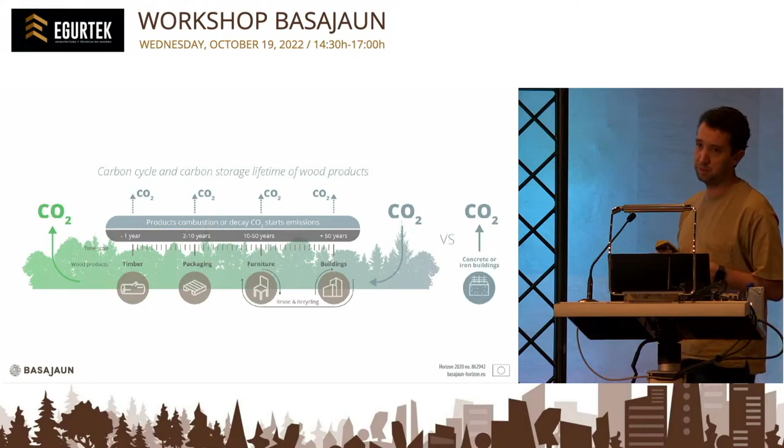We, as UNStudio, are responsible for the architecture. But it's not architecture in the classical sense. It's architecture as a systems integrator, working with different experts. So those are fabricators, those are research institutes, those are a whole range of companies.

And each of them brings the knowledge to the project, first in digital form, then it's produced throughout Europe again, all the way up to Hungary. It's tested, and that's how we work together, up to now quite successfully.

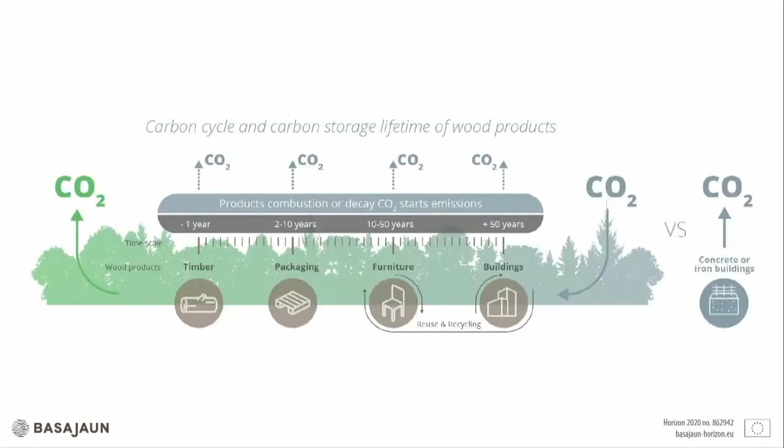And really looking at, we start with the raw material in the forest, so tree trunks, and then see how we can kind of upgrade it to a product and then assemble it in the architecture.

First looking at how we can optimize the resources, then from forest products into sub-products, then in systems. So a system in architecture is, for example, a window with a window frame, or a partition, or a roof panel. All modularized and described in our computer model, and then put together to an experimental pilot building.

And the last step, I think at the end of the process, is also the fact that you put everything together, but how can you take it apart in a smart way so you have the least possible amount of waste. This goes back to cradle to cradle principles and how you can reuse materials in a smart way.

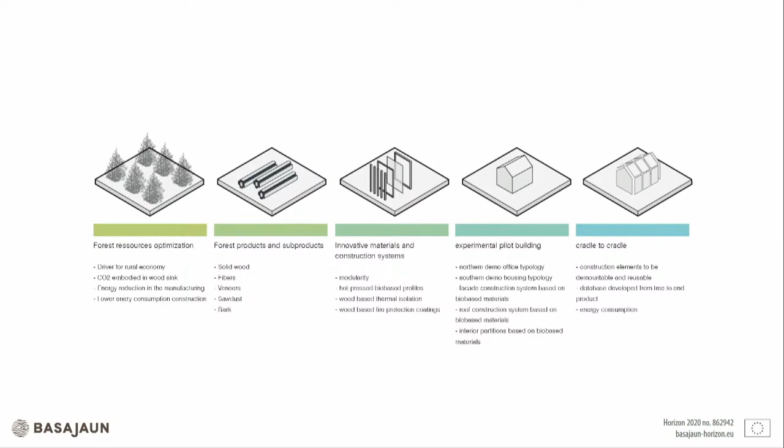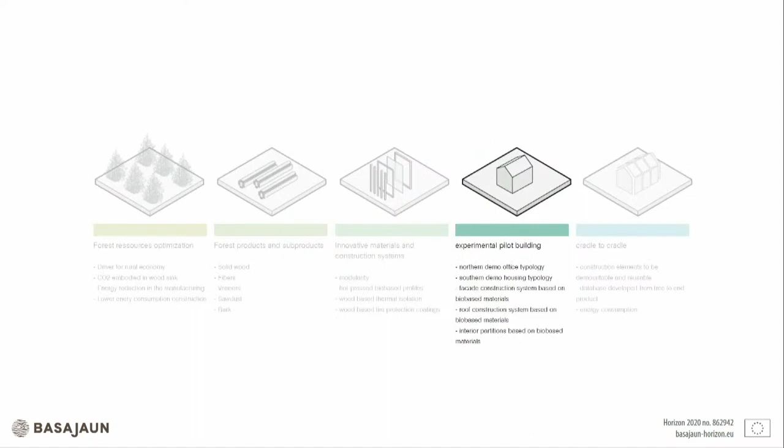So for the pilot buildings, I think those are nice to see. We have two pilot buildings. For the EU, it's very important that the topic is applicable over the wider European market.

So we have one pilot building all the way up in the high north in Finland, and one in the south of France, in the Gironde. Both of these buildings are dealing with very different cultures of building, different climate, and in a way these represent the different situations you might find in the European Union.

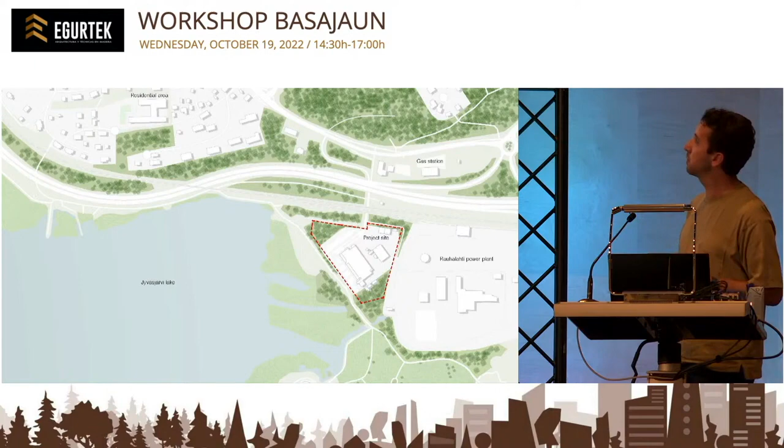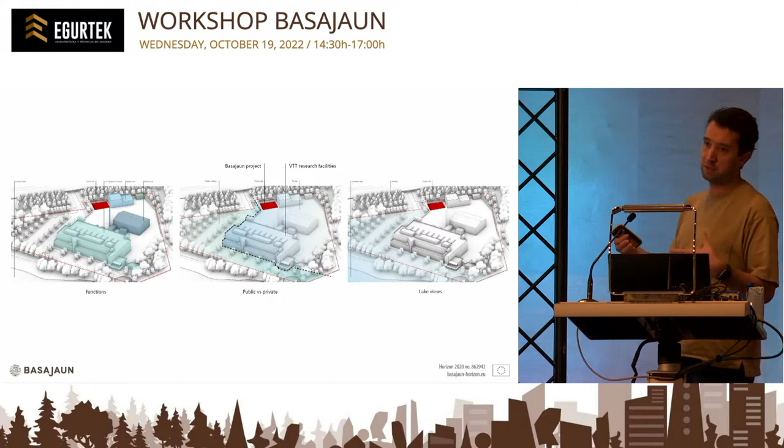We were inspired by the natural features, so the woods arriving there, and we tried to integrate it into the site. What you can see to the top is the road coming in, and in the red location that's our plot. It's the first moment you see the site, you see the building, and that's where your experience starts. There's been a whole process of back and forth, testing things, looking at the geometry.

But the key thing is that we connect to the other buildings, and the meeting space in the building has a very nice large window overlooking the lake.

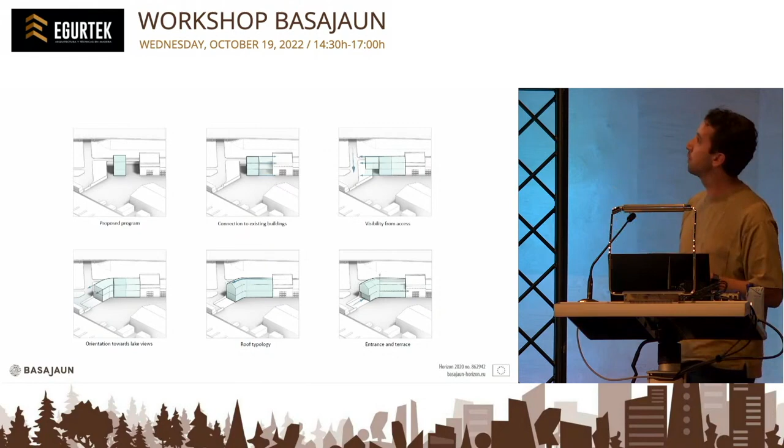So here you see an early iteration. We worked closely both with the partners and with VTT to see what the functionality of the building should be. At a very early phase, there were different manufacturers who looked at the glazing, the roof, the partitioning, and the facade.

Here you see the first design model, just a sketch basically. But from the sketch, as you can see, we started to add more detail. Here you see all the interior partitioning in plywood.

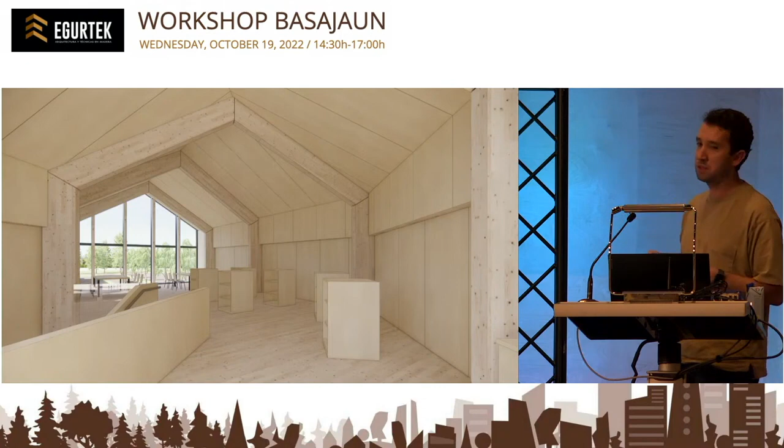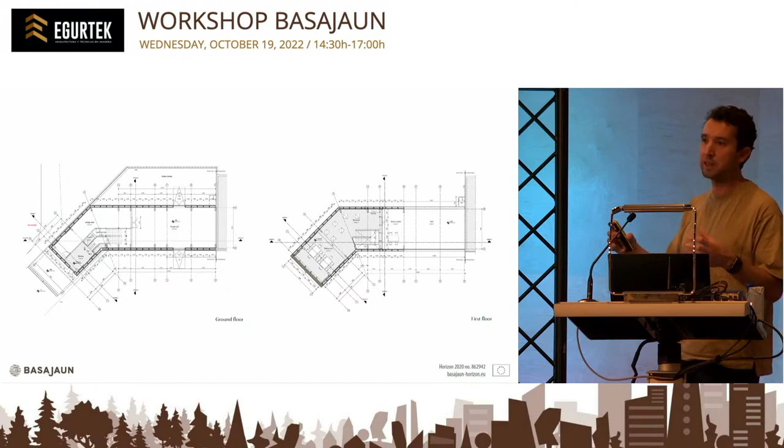Here you see some of the drawings generated in our building information model, in a software called Revit. That's where you can organize all these different building elements and track them back into the supply chain. That's quite a conventional procedure in the building industry, but it's our intent to go from the building back into the model and eventually to the supply chain in the forest to really create that link within Europe. How do you use your wood?

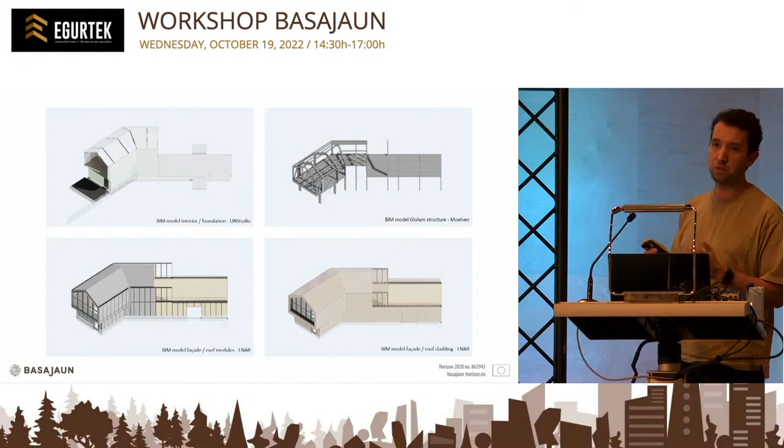Here you see submodels within the main model. A very important part is, for example, the structure. The structure is a glulam structure produced by our partner Moelven in Sweden. They made the structural model, which was then coordinated with the facade model from a company called Inar from Madrid. This was done through meetings, but also in this digital environment, so we as a team throughout Europe could work together on this project.

Coming to the other building, this is the southern demo building. It's a residential project. There were already big plans for a school. We were not the architect of the school itself, but the architect was kind enough to let us take the residential part, the teachers' housing, for the Basajaun project.

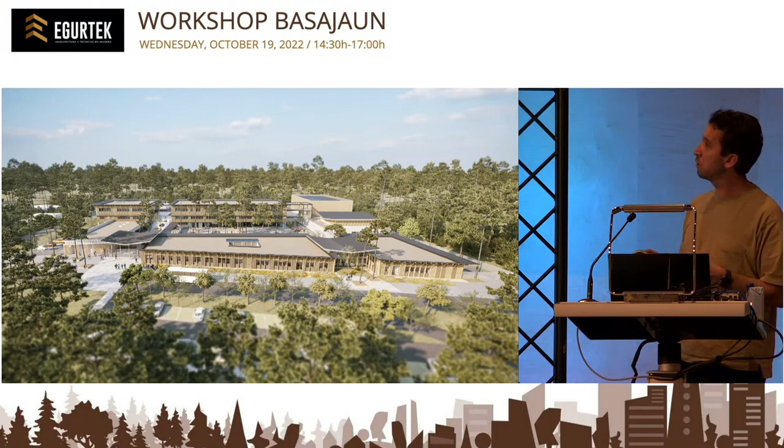Together with the French architect, we worked on that project. This school is built out of concrete on the inside, and on the outside it's clad with very nice wood. But for the Basajaun project, it was the goal to make the complete building in wood.

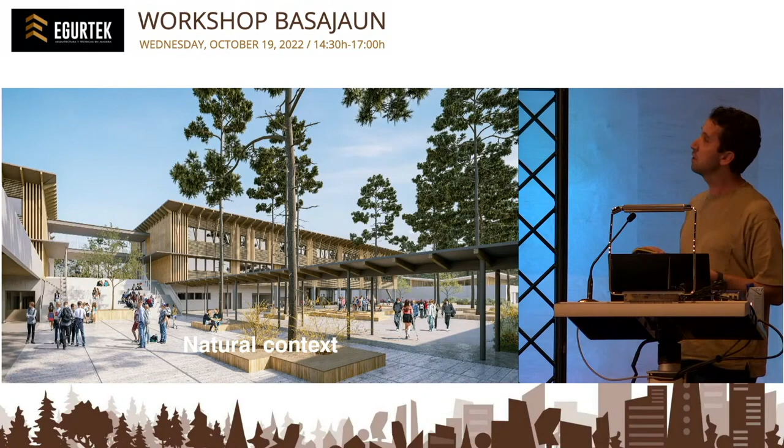So this is the project site near Bordeaux. Again, the school, just to get a feel of the existing design. And in red, we are located next to the school. We tried, together with the French architect, to follow the initial design ideas so we could fit in with the overall site.

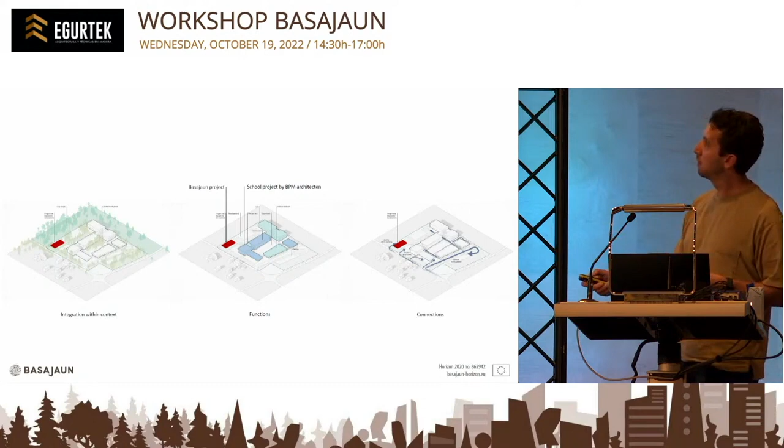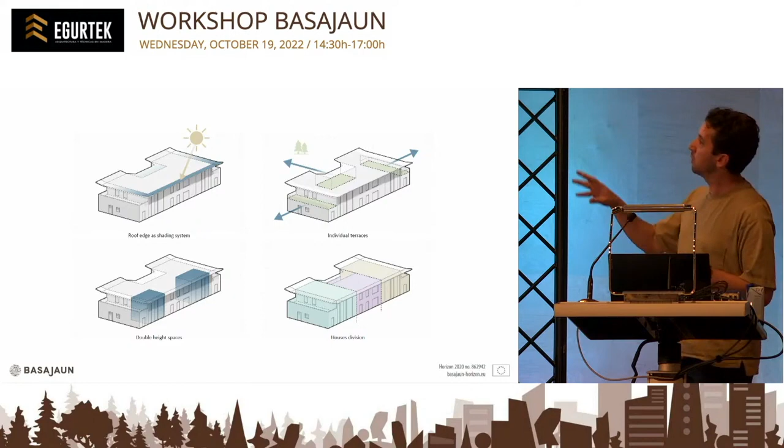Here you see a number of design exercises we did. Apart from working with wood, we also tried to apply sustainable strategies that we call passive measures. We looked at the geometry of the roof to provide shading, so the building requires less cooling. We did options on placing terraces and shaping these houses. And this is how the early sketch looked like.

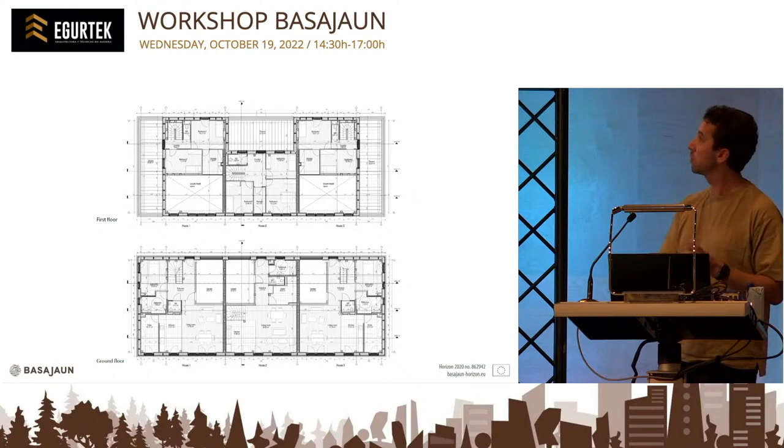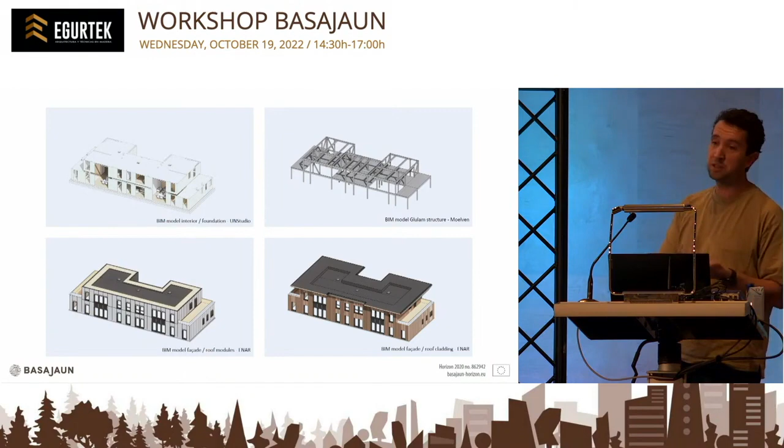It was again coordinated in the Revit model. So you see here the three houses set up with all the modular elements that we are also providing for the finished project. There's a system that you can use for both projects throughout Europe, and with that system you can make very different designs. One is an office building and this is a housing building. Looking at the submodels, there's a similar story to how the intelligence is in the project, but with very different results.

And then together with our partners, some of the systems, for example the windows, the partitions and the roof, were also made smarter.

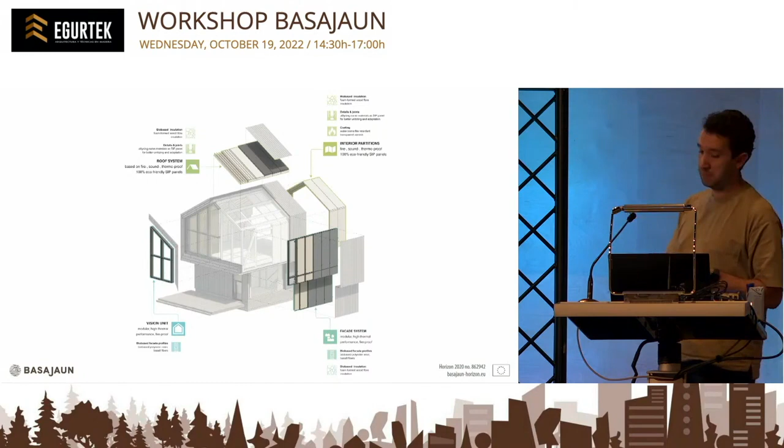And going all the way down to the technical details, like how this is assembled, what are the different layers, just to give insight into what is possible with this nice product. Here you see how the window is built up. Normally you would expect either window frames in aluminum or massive wood, but here it's done in biocomposite, which is very innovative and actually quite difficult to produce still.

But it's some of the more fundamental research that we are undertaking for the EU, and hopefully we can also bring this to the market later.

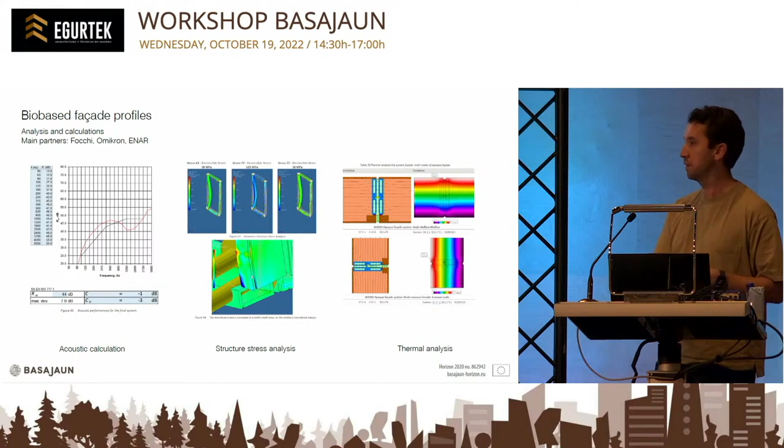All the testing needed, especially on new products - I think French regulations are very strict. There are very strict procedures you need to go through to get approval, so you're actually allowed to build. We did testing on fire, noise, wind, all of this properly documented. Here you see some of the nice profiles. It looks a little bit like wood, but it's really based on this kind of composite.

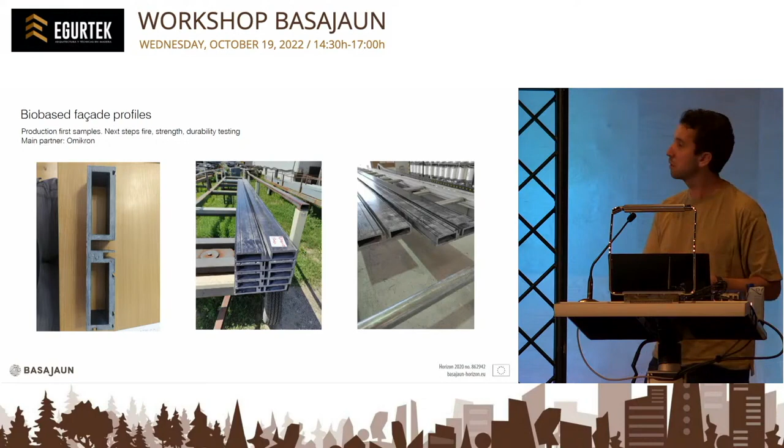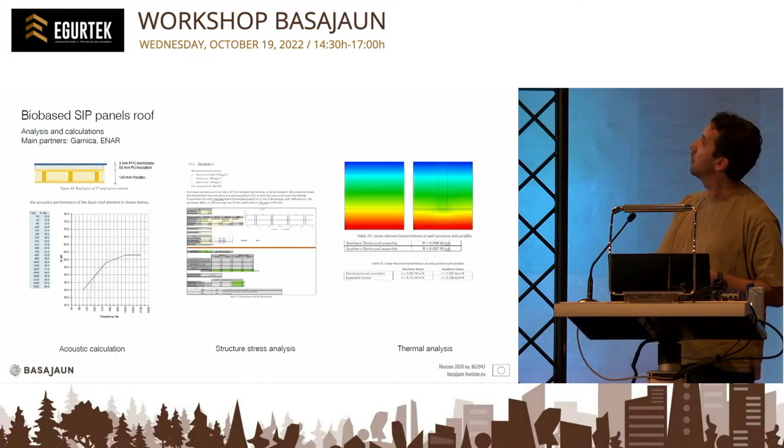How it's assembled in the factory. Here you see the roof panels. So that's roughly where we stand now.

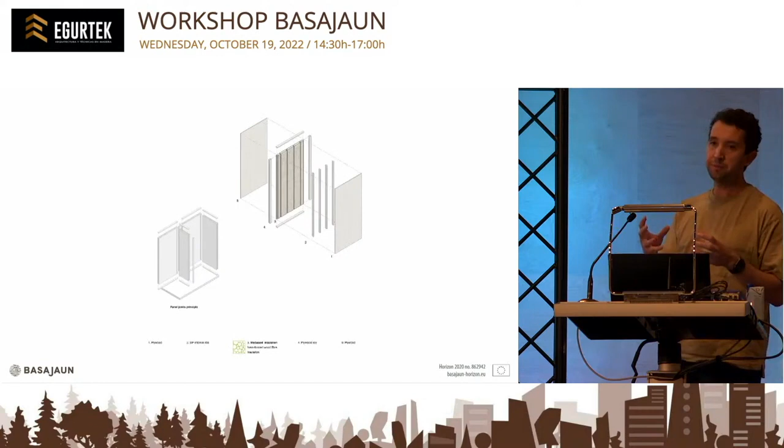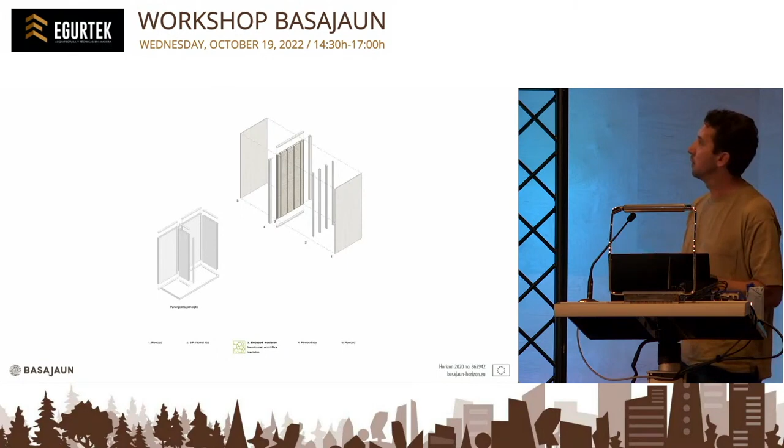The partition walls, and what I just want to touch upon still is the topic of reuse. This is a very interesting topic, it has to do with how you put things together, and can you dismantle it later? If you put a lot of glue and everything, it's very difficult to take it apart and use the separate pieces in a practical way. But also in the detailing there's a degree of smartness to enable that.

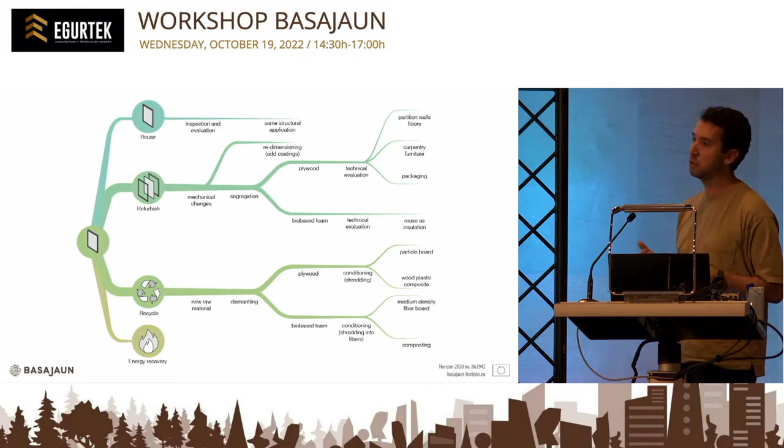As we looked before, supply chains go from forest into a product, into an architectural building. We could then turn it around, going from the building back to the window frame, to see what kind of future use it could have, to see if we can make this cradle to cradle in that sense. So also testing is happening on that process.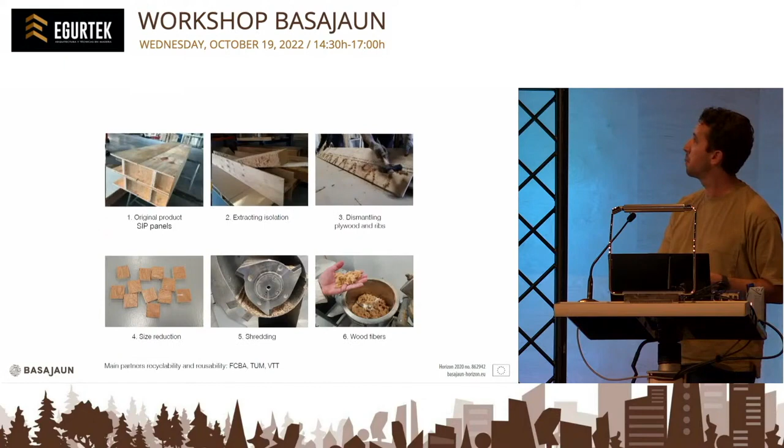So a lot of different engineering, designing, testing - a lot of fun stuff with wood. I hope I've given a nice overview based on our demo buildings. We'll finish with a movie just to give you a feel of what we're doing. Let me see if I can get this started.

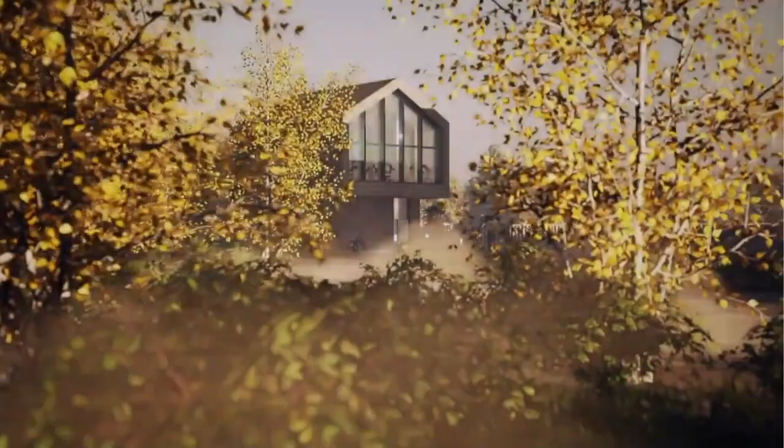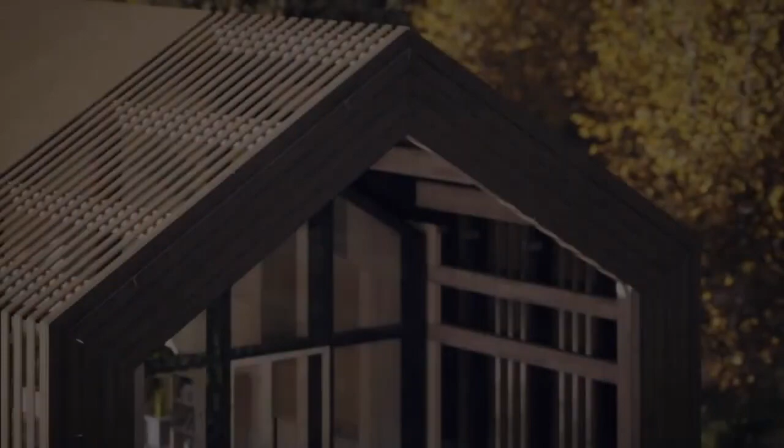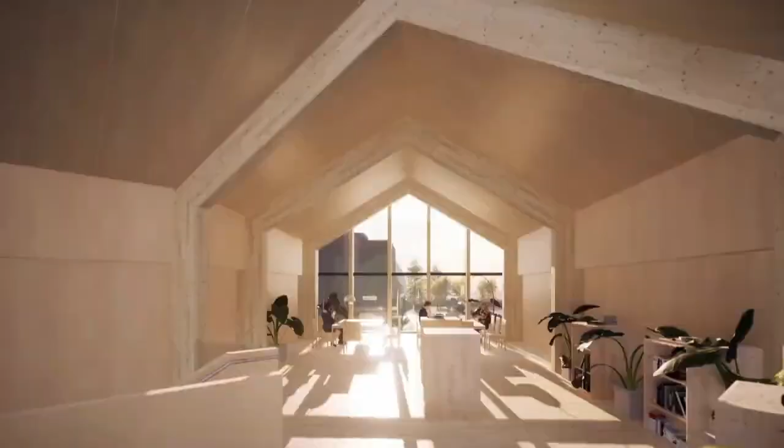Yeah. Thank you. Thank you.

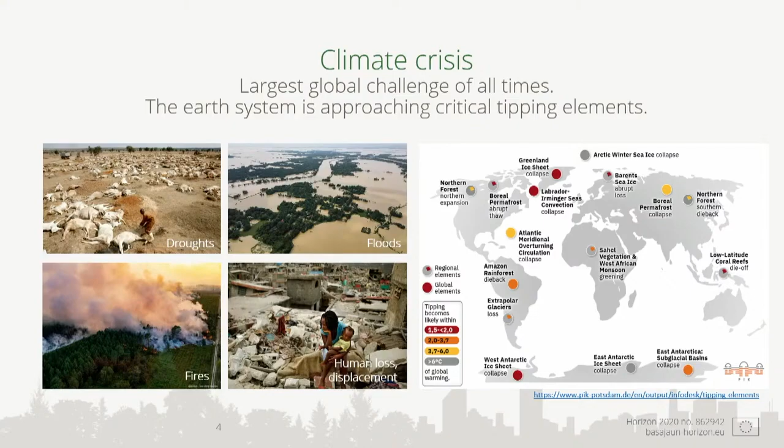If you look at this map produced by the Potsdam Institute for Climate Impact Research in Potsdam, if we are reaching a 1.5 Celsius degree world, and probably we will overshoot, we will reach probably even a +2 degree Celsius world. The impacts are already very visible and happening in the global south, on other continents, but it's starting to become serious also in Europe. So the +2 degree Celsius future lies ahead, but how do we adapt to that?

Do we really do what's necessary today? Looking at the political decisions we are taking, the way our lifestyle is emerging, I think this is the main issue. Although we have an energy crisis, we had COVID, we are still in an economic crisis, it will become serious.

The built environment and the building sector as a whole accounts for more than 40% of carbon emissions globally. This includes the whole supply chain, the production of materials, and the waste it generates. When we tear down buildings, we create a lot of waste and mass.

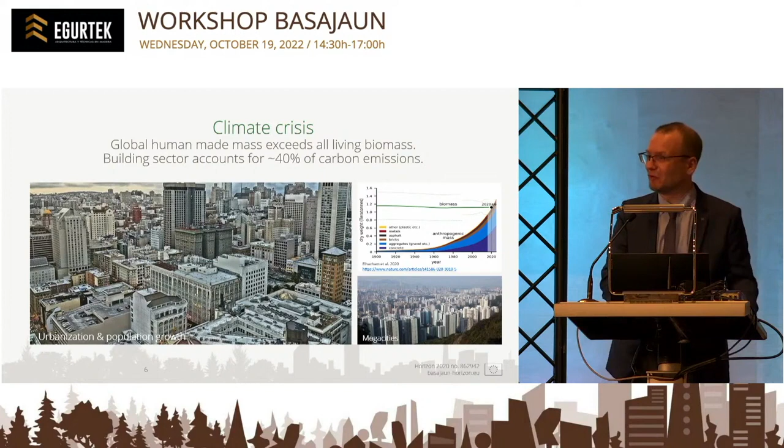And the trend is not stopping. It's rather accelerating. The population growth is continuing, and in many areas of the world we are expecting huge megacities. If we just implement everything that is planned to be built in concrete, we are just accelerating climate change.

If the supply is right—and of course life cycle assessments are very complex, it depends on the country, depends on the comparison—but wood engineered products can even be climate negative. So if you build in wood, you can actually reduce the overall climate impact.

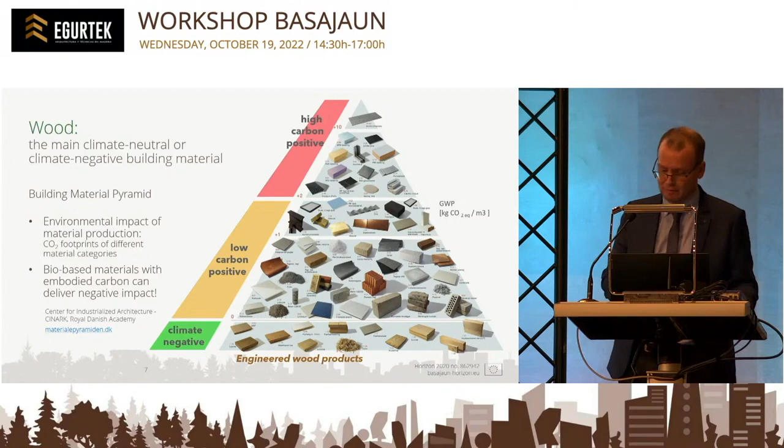If you think of our sector, the forest-construction chain, you can think of it in a larger context as becoming a carbon pump to decarbonize, to take carbon out of the atmosphere. If we have sustainable forest management, we produce long-life wood products, and these are stored for a long time in the built environment, in buildings.

And then we also prolong this lifetime through circular economy uses and more ideas on how to use the material in the right way. Then this can become a carbon pump, so cities can become carbon sinks on a larger scale if you upscale wood products.

This requires, of course, what we've also demonstrated in the presentation before: we need to link forests to buildings to products, we need digitalization of the supply chain, and we need to really manage that. It's not just that using wood immediately makes it sustainable.

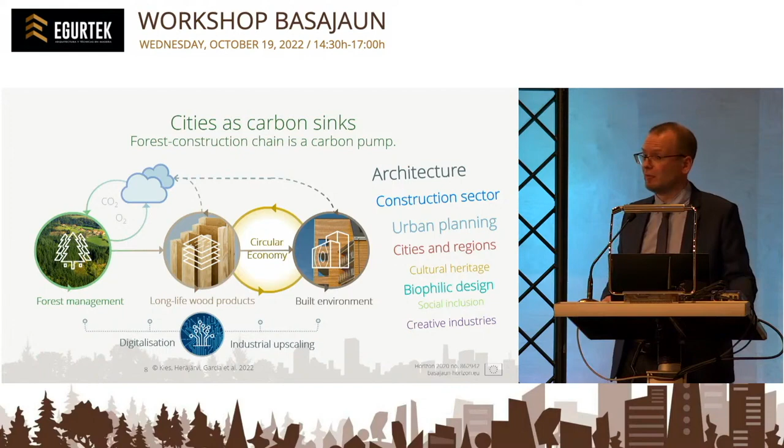There's a big risk that we overuse forest supply materials. So on one side we have to develop this supply chain in our sector, but we also have to reach out to all the other industries and actors in the built environment — architects, construction companies, urban planners, cities and regions as decision makers — on how we actually build the cities of the future.

This idea is becoming very prominent on the European scale. The President of the European Commission, Ursula von der Leyen, raised a lot of attention when she started the new European Bauhaus movement. A key phrase she stated already in 2020 when she took office: we know that the construction sector can even be turned from a carbon source into a sink if organic building materials like wood and smart technologies like AI are applied.

The reason the President of the Commission is picking up this narrative is that very eminent scientists, for example Professor Hans Joachim Schellnhuber, Director Emeritus of the Potsdam Institute, and many other climate scientists, address this topic now and say we need a solution to decarbonize the built environment. His main statement, heard in many of his speeches now, is: we need to reforest the planet, retimber the cities, and then timber construction can become a silver bullet for climate change.

So this is the political context and the narrative which is really coming in favor of wood today. I think Basajaun came at the right time. We now have demo buildings being constructed, and we have all these solutions, so we want to show these results and disseminate them more.

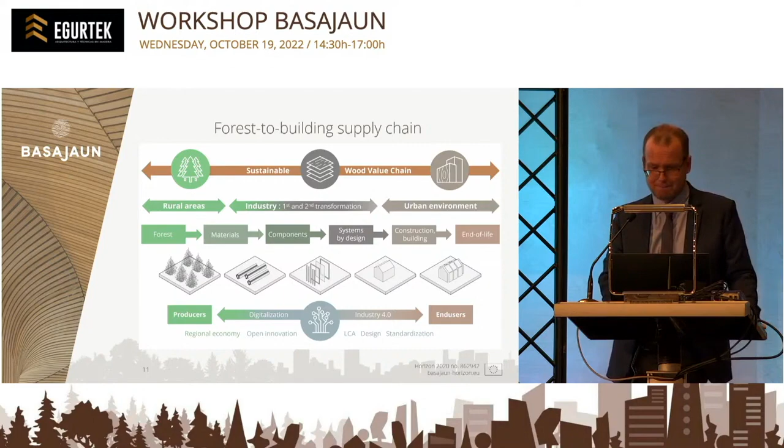We are addressing this forest-to-building supply chain, from forests to products to the built environment, covering various aspects and important questions like circular economy, end of life, systems by design, and digitalization. The project is comprised of 6 work packages where these different topics are addressed.

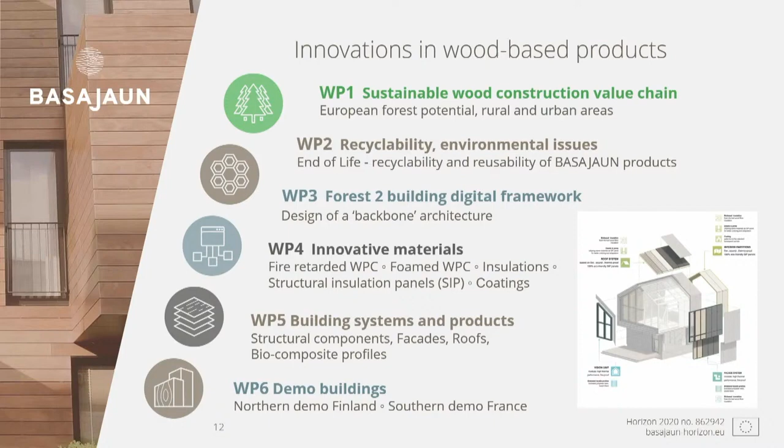I'll go a bit fast here because we want to get to the discussion, but it goes from forests to materials to building products and innovative systems, which end up in these demo buildings. Here are a few pictures highlighting various innovations developed together with companies, tested and approved to be part of these demo buildings.

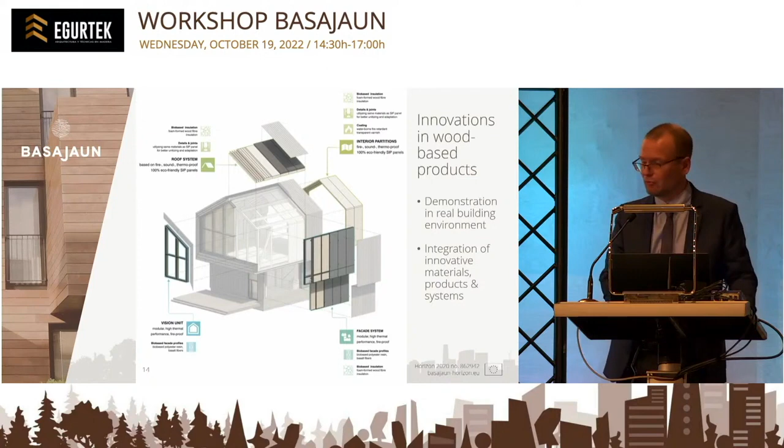This is again the system view, so that all these different components can be integrated, which is actually quite challenging because we have to adapt to the regulatory framework when bringing in innovative materials and products. The 2 demo buildings we've seen in the presentation from UN Studio.

Again, some views. Another step we are actually currently working on in the project is making the link to rural and regional development.

We have 5 pilot regions in Europe: 2 in Finland, 1 in Poland, New Aquitaine in France where the main demo building will be constructed, and also the Basque country. Within these regions we started to assess what the wood construction chain looks like, the stakeholders, the main actors, and the research and development needs for the future.

We are also working on a series with stakeholders to get feedback and inputs from people in the innovation ecosystem there. We will discuss this a little bit later also.

We have put together a publication, a first one on this: Transformation Needs of Wood Construction Sectors in 5 European Regions, published by one of our members in the consortium, the Natural Resources Institute Finland. This is a first overview of where we are with the project, and we hope to discuss more later. Thanks a lot.

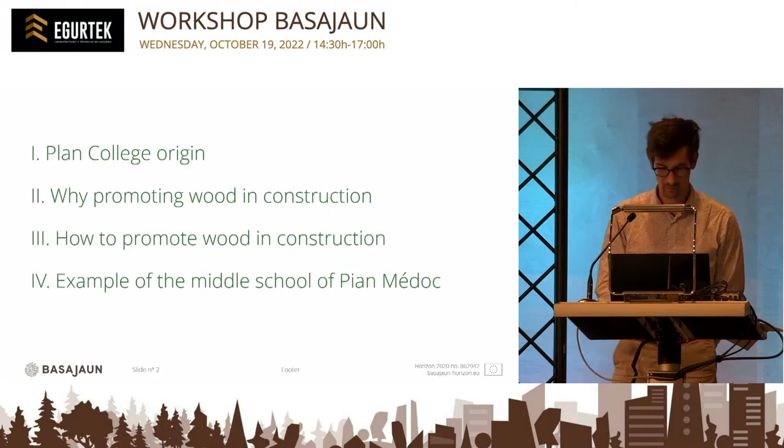Gironde has been gaining an average of 20,000 inhabitants each year since around 2008, and the demographic forecast predicts an increase of students until 2025. That's why the department, the public authority who builds colleges, decided in 2017 to set up significant financing to create and renovate existing colleges.

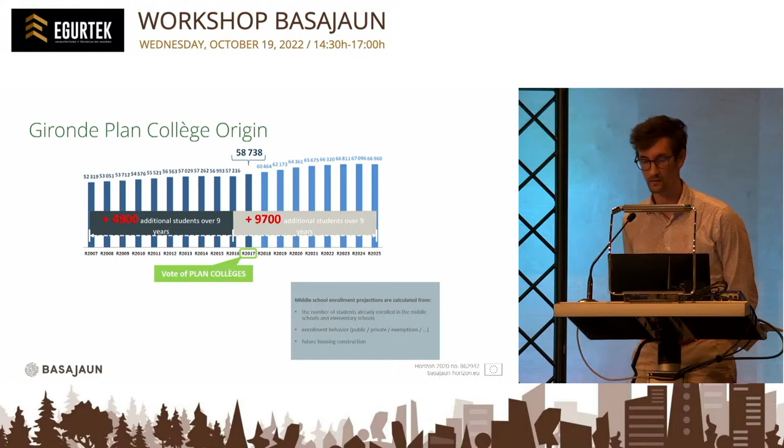That's what we call Plan Collège 2024, because the objective was to build most of these colleges by 2024. So there are 14 new middle schools and 10 existing middle schools that we are renovating.

So firstly we built a map with the forecast, so we could see in red some cities where there would be too many students, so we had to balance pupils from one college to another to distribute the demand as much as possible.

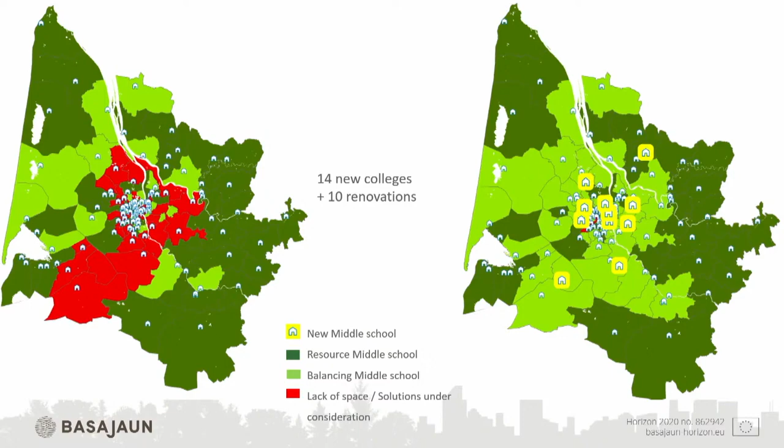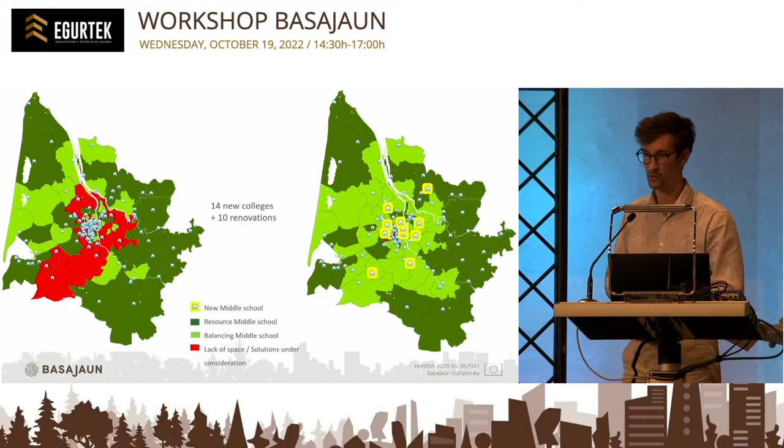After that, we created a new map with a yellow symbol, a small house, to show new colleges built to respond to the demand. This year there were 6 colleges completed in September, when the pupils could start a new year in a fresh building.

So let's get to the point: why are we promoting wood in Gironde department? First, because of the policy framework. The EU directive asks public authorities to reduce carbon emissions, so we have to do this as a public authority, as a department.

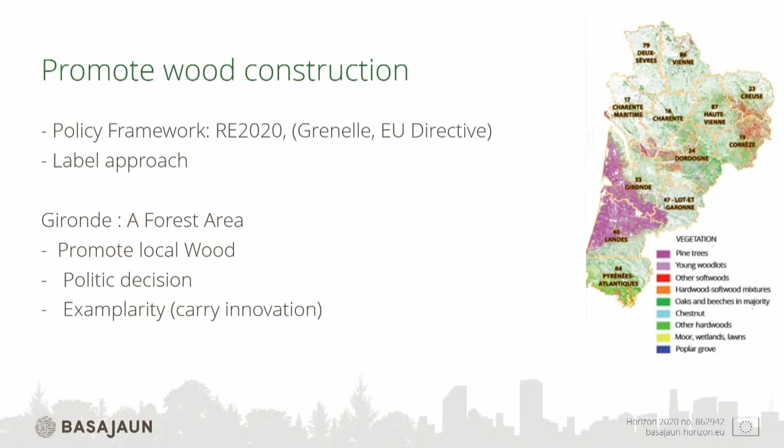France decided to be a precursor and implemented a regulation from 2012 with specifications to build buildings, and another regulation in force from this year, January, called RE 2020 - the environmental regulation.

The department wants to contribute to the achievement of national goals and participate in building bio-sourced, low carbon emission buildings, because we think public institutions should be a role model regarding innovation and can develop more use of wood in the construction sector.

And these projects are also helping to raise awareness among citizens about sustainable building and living.

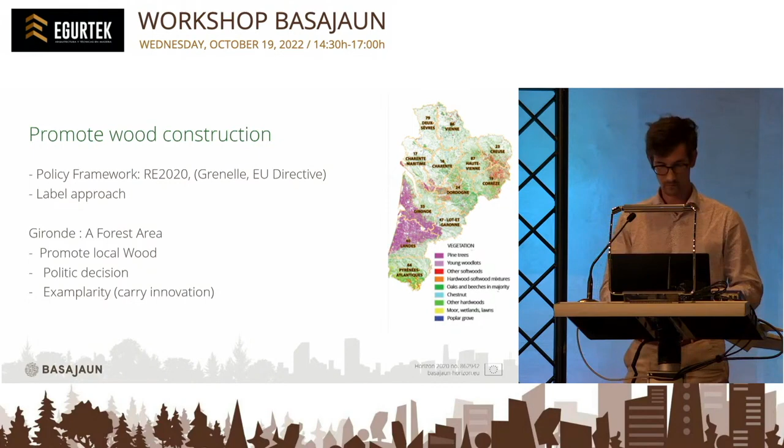So about public procurement: the Plan Collège is a good practice, a good example of public procurement that should foster wood construction in France.

So how do we do it? The department in France uses two main procedures to select companies and implement good practice. The first, which is most used in France, is what we call the MOP law.

This law establishes for public authorities the relationship between the contracting authority, which is us, the public authority, and the project manager, which is usually the architect. The architect carries out the design studies and writes the specification, then we search for multiple construction companies.

This is good practice because it respects public procurement by offering equal opportunity for each company to access the market, since there are several different possibilities to contract with different enterprises. It's not just one big one that needs to have good finances, etc.

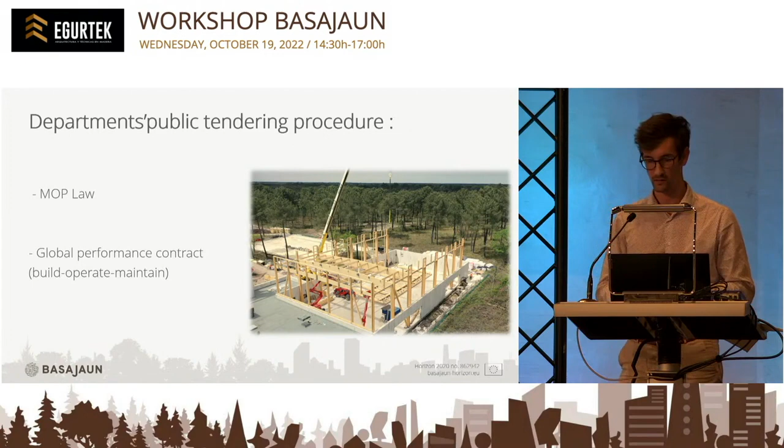So to achieve these ambitious environmental buildings, what we do is create a program that asks for exemplarity in environmental construction with certain specifications - for example, the use of wood or other bio-sourced materials.

We also demand candidates reach a level required by specification certification on environmental specifications. The label we use is called E+, C-. The E stands for energy, the C stands for carbon, which measures the carbon we emit all along the life cycle of the buildings, from construction to exploitation.

This label permits us to constrain the constructor to reach ambitious environmental objectives. Another thing in public procurement is what's called the tender rules, which describe the conditions under which the candidate proposal will be assessed.

So we give priority to technical criteria over price when choosing our contractor. For example, for our colleges, we use only 20% of the assessment for price, and the rest, 80%, focuses on local economy, environmental and architectural impact - so it demands, in this assessment, a certain amount of wood.

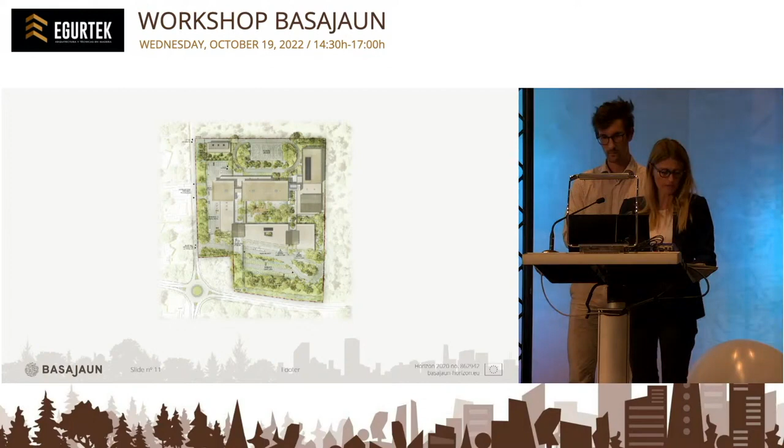The building owner is the Conseil départemental de la Gironde. The architect is BPM architect, Delphine Peroveni et Eric Wirtz. And the building company is Bouygues Bâtiment Centre-Ouest. The construction floor area of the project is 9,600 square meters.

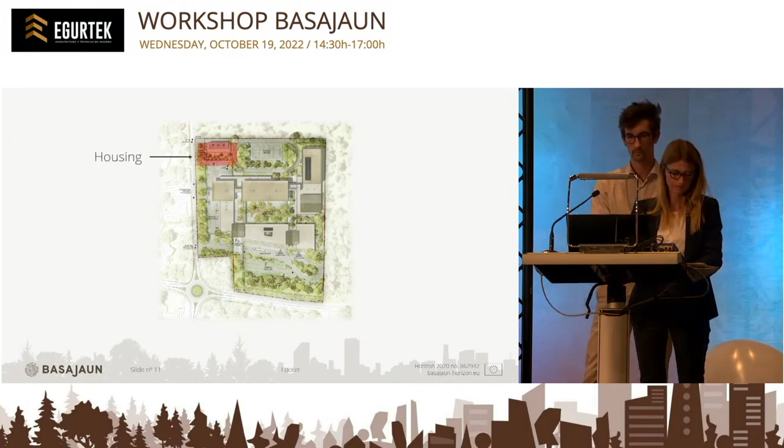The Basajaun housing will be built on the north part. The new college at Pian-Médoc is the main showcase for wood construction in the Gironde Plan Collège. The Department of Gironde included a specific requirement dedicated to wood material.

The wood material had to be promoted visually on the spot. This specificity ensures that the buildings will fit well into their natural surrounding forest environment, as the college is located in a rural area, in the middle of Landes, pine and ash forests.

The college opened in September and welcomes 800 school children from 2 communes in the sector.

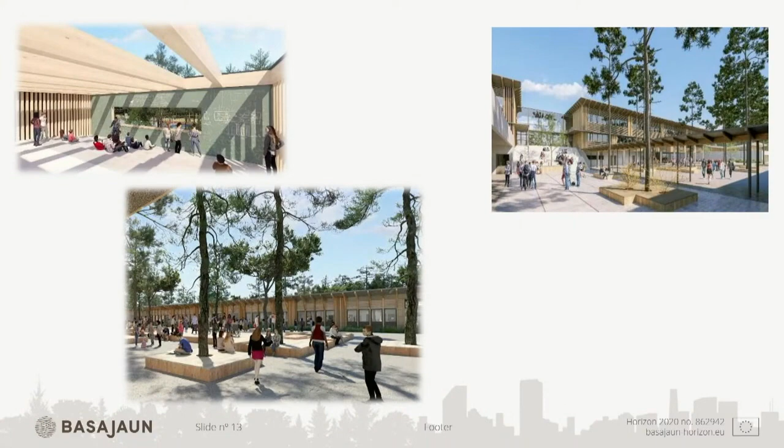To reach the demanded high level of wood, the construction site needed to use at least 80 liters or cubic decimeters of wood per square meter. In this school, the figure has reached 119 liters or cubic decimeters per square meter.

A second aspect of this construction is that part of the wood materials used for building actually comes from the construction site itself. Further wood materials have also been used in the school building itself, mainly for insulation, frames and cladding.

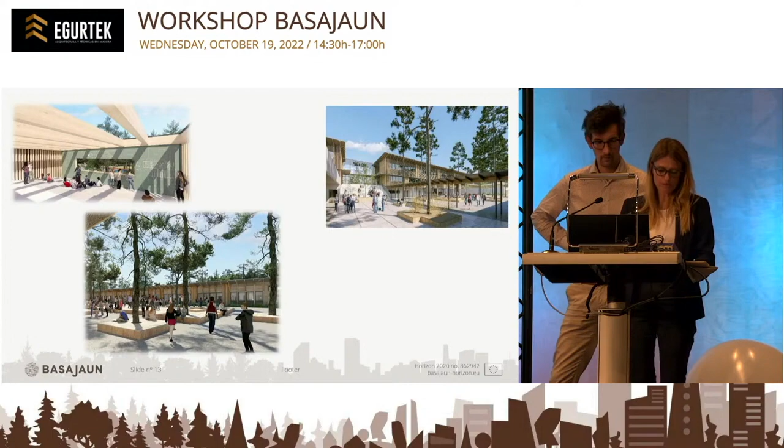On the environmental level, it has adopted ambitious criteria with the search for the experimental E+C label, the use of biosourced materials, the search for energy efficiency in buildings, and compensation measures for biodiversity.

Environmental program: the first is to respect the site, keep the wood of the plot and use what has been cut, to have a project that integrates with the landscape and in which one feels good.

Reducing the impermeability of the soil by using permeable materials for parking, infiltration of rainwater on the plot, and developing ecological spaces. Number two: low consumption, energy efficient, with energy production from approximately 200 square meters of photovoltaic panels.

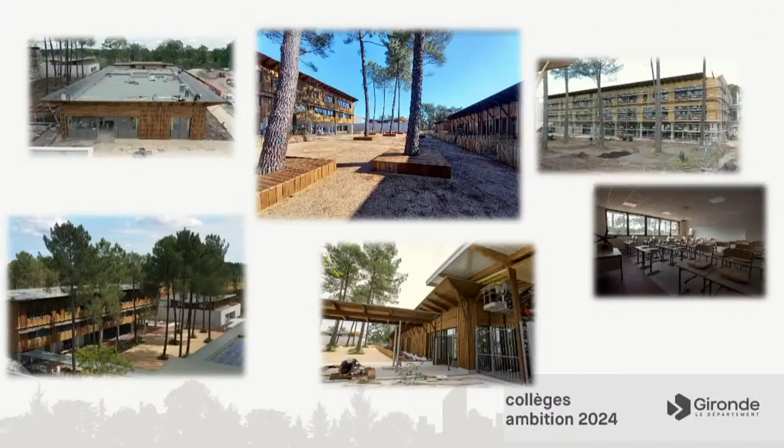Wood type and location: vertical cladding, maritime pine, wood origin from the land and plot of the college. One of the major goals, to promote the use of local wood, was the reuse of wood from the plot. Indeed, the stock was not sufficient to carry out all the facades. For question of harmony, the architect didn't have a choice but to use the same wood type.

Finally, the college incorporates innovative organizational and operating principles: the volumetric organization of the playground, gender neutral toilets, a new organization of the canteen and the outdoor terrace, and an outdoor classroom to take advantage of the site's biodiversity.

The new college was very well accepted by the children and by the school director. Thank you.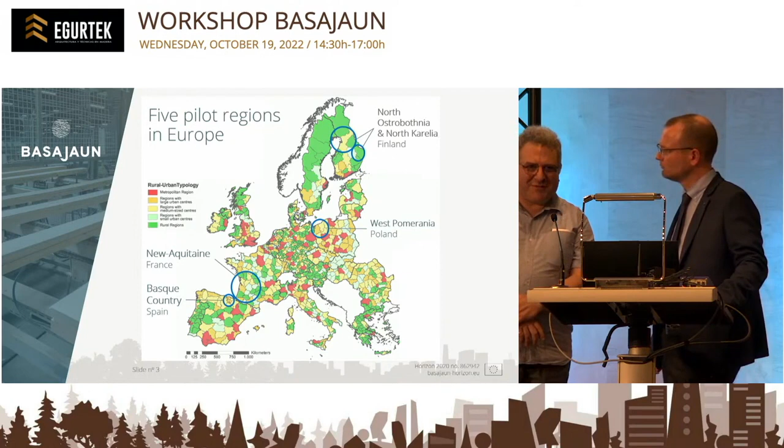So let's start from the south to the north. We have the Basque Country, where we got a big work already in a previous task in that work package, where we identified all the socio-economic context of those 5 regions. So Basque Country, New Aquitaine, West Pomerania, that is in Poland, North Karelia, and North Ostrobothnia in Finland.

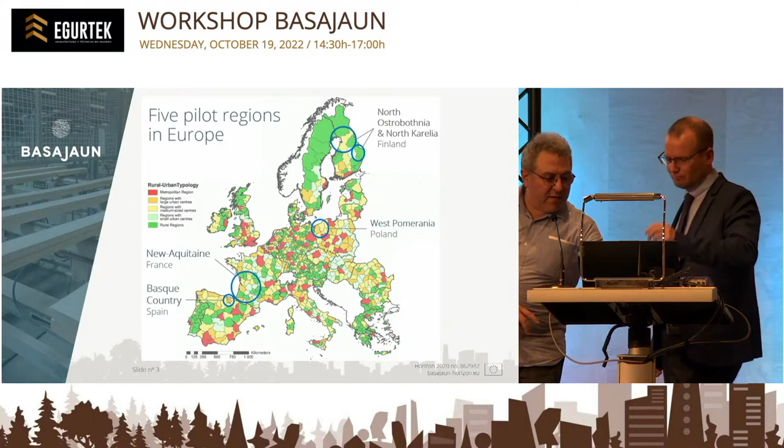First work was to make a comprehensive assessment of the pilot regions, and this we finished in 2022.

And we published this work through LUKE, that is our partner in Finland, on a bioeconomy series platform, or not platform, or communication publication.

Voilà. So, and now we're following up with task 2, the second task that actually ended in September 2022, and there we started drawing our open innovation platform, and this is why we revised a little bit our approach, and now we're talking about building the foundation and not building the open innovation platform, because an open innovation platform would be very big to handle in

the time we have and the focus that we are having. So we are building the foundation, and now we are seeing what we have to interact with to get that open innovation platform active and living, standing alone after the Basajaun project. This is our aim in that work, and today we know what would be necessary.